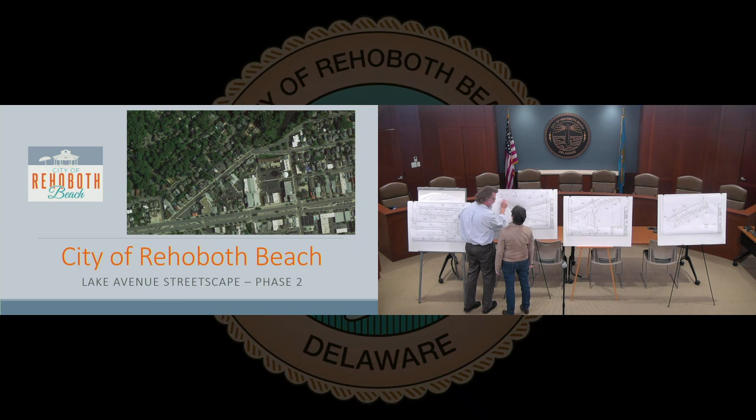This was all done back in 2012. There was nothing there, and we know that's there. But 2013 is when this was started. So we're not gonna touch any of that, if anything. It's just you're gonna need to be adding more. So if you see, we're gonna pretty much follow the curb line, but we're gonna put it...

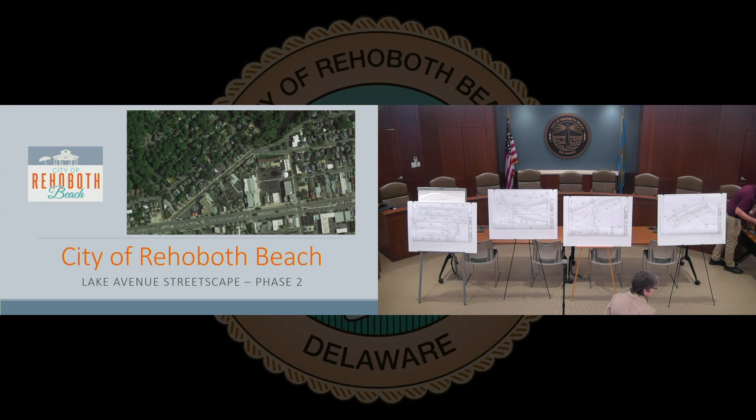Thank you all for coming to the Lake Avenue Streetscape Phase 2 project. We kicked this off about 5 years ago with Phase 1, a very successful project with our folks here on staff, who I'll introduce you to in a second, and then Jim Lober and Jeff from Kercher Engineering will be speaking as well. This is a project that the city's wanted for many years, Lake Avenue Streetscape Phase 1 and Phase 2. Phase 1 was successful for those folks who live there and the businesses. Hopefully it was successful—it was a headache while it was going on, but as construction always is.

This is an 80% funded program from DelDOT and 20% from the city of Rehoboth Beach. So we're looking at those valuable 80% funds to come through here. From the city, I'm Sharon Lynn, the city manager, for those who might not know me. Mayor Kuhns is here in the audience.

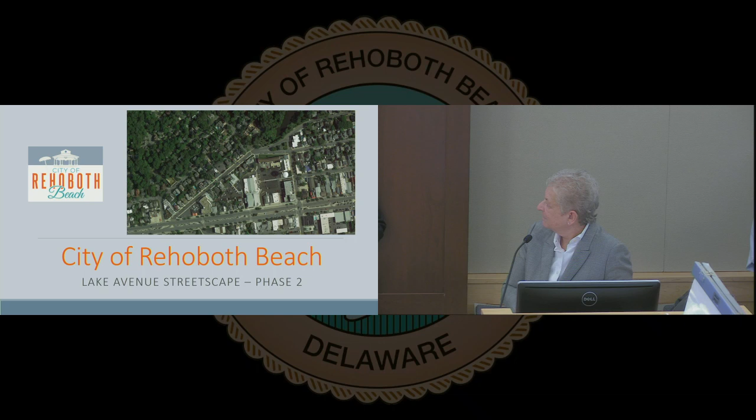So with that, we'll have Jim give you some factual information. Thank you, good morning everyone. As Sharon mentioned, my name is Jim Lober, I'm with the Kercher Group. We are one of the engineers that represent the city in projects like this. With me today is Jeff Williams, who's the main design energy behind what you see in black and white on the paper here today.

So just quickly, I'd like to go through essentially what, where, and when—what are we doing, where are we doing it, and when are we going to be doing it—so that everybody has a general idea of how this project is going to proceed and affect your daily lives here in Rehoboth. As Sharon mentioned, 80% of the funding is coming from the federal government through DelDOT. It is available to us because the crux of the project focuses on pedestrian safety and traffic calming.

So the improvements we're proposing are going to focus on pedestrian safety, wider sidewalks, traffic calming, and slightly narrower travel lanes. We're also going to be providing ADA compliance. Most of the stuff out there today is ADA compliant because the city does a good job of keeping up with those things, but some isn't. So as we go through everything we put in, we'll also provide ADA compliance—cross slopes, ramps, truncated domes, those types of things.

We're also going to provide some drainage improvements. There are some low spots that don't drain very well today. There are some pipes that are mixed materials, and some pipes that have holes in them, things like that we've discovered along the way, so we'll be replacing those as we go. And also some stormwater management—we're going to install one stormwater management BMP in the median between Olive and Maryland that will provide a little bit of quality control for the water that runs off the streets and then into Lake Gerar.

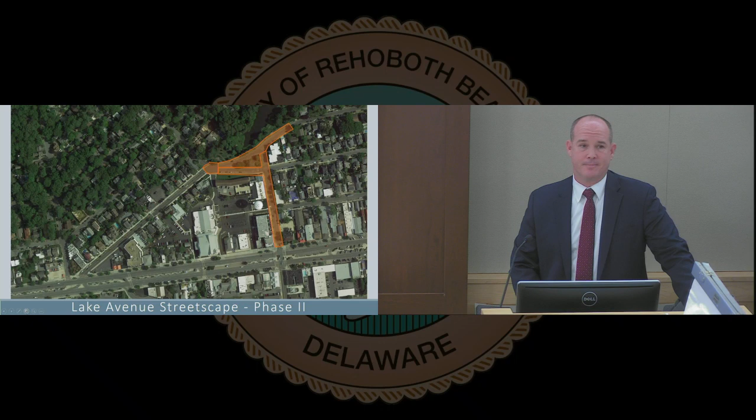Hopefully I didn't go through that too quickly, but that's the basics. If we have any questions, we're happy to answer everything we can.

Question: what about the staging area, where will you have your staging? The way the project is going to be staged is that we're going to close down the roads we're working on at the moment, other than for local traffic. The amount of space closed down within each phase of the project will allow us to stage within that phase, on the portions we're not currently working on.

Question: what about the parking that's currently there? I believe all of the parking currently there is to remain - it will be disturbed during construction, but when we're finished, parking will be essentially restored.

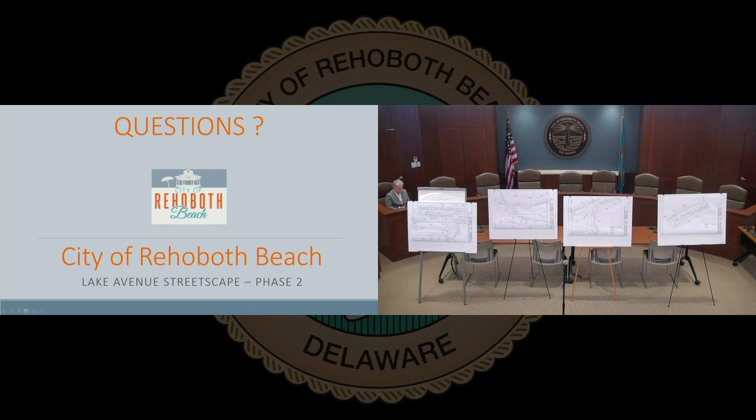Question: what does the stormwater management area in that little triangle look like in concept? It's what everybody would know as a rain garden. We'll dig a bigger hole than you'll see when finished, then fill it back up with planting soil - a mix of peat moss, sand, and mulch - with under-drains. What you'll see at the surface is a depression about 2.5 feet deep, with soft slopes, and a mulch planted bed with a catch basin as overflow. Water drains off the street into it, pools up, and slowly filters down through the planting media into the underdrain, which takes it to a catch basin.

In larger storms, when the slow surface filtration can't handle it, water builds up and overflows into the catch basin, then goes through the pipes. The pipes we're connecting to are existing drainage pipes that currently go to the lake. We'll be replacing that pipe because it's in bad condition, but it's water that gets to the lake now, and it will still get to the lake when we're finished - just slightly cleaner, and through a new pipe.

Question: will there be any additions or deletions of stop signs at the current intersections? Yes, good question - we're changing the intersection at Lake, 3rd, Olive, and Maryland significantly. That's currently not really an intersection in my mind, just a large swath of asphalt where everybody passes through. So we're going to extend the median, neck down the sidewalk from the sides, and create a formalized four-way stop intersection, so proceeding east on Lake, you'll have a stop sign.

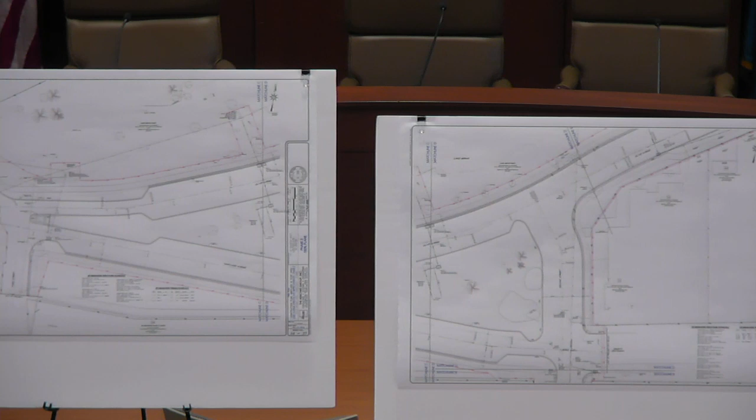You're proceeding south on 3rd, you'll have a stop sign. Proceeding west on Olive, you'll have a stop sign. And as you come out of the parking lot here at this facility, you'll also have a stop sign. So you'll have a 4-way stop condition. Also at the intersection of Second and Olive, we're going to add a stop sign there as well.

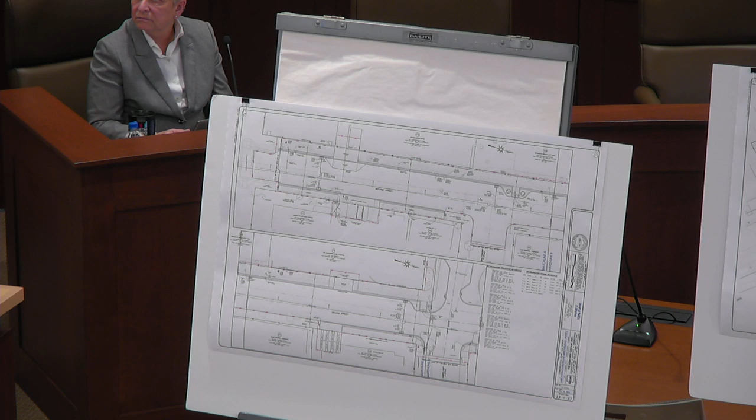Is Second turning straight now instead of at an angle? Second currently comes into Olive at an acute angle, so what we're going to do is bend it a little bit to bring it in at a 90. It actually comes in at a 90, but it's a lot wider, so we're going to lessen that radius turning east onto Olive, making it an actual intersection and putting a stop sign there.

I was going to ask, to make it easier, could you show us, because it's kind of hard to say? Could you show us on the plans so we can understand it a little more easily? Thank you, so this one here.

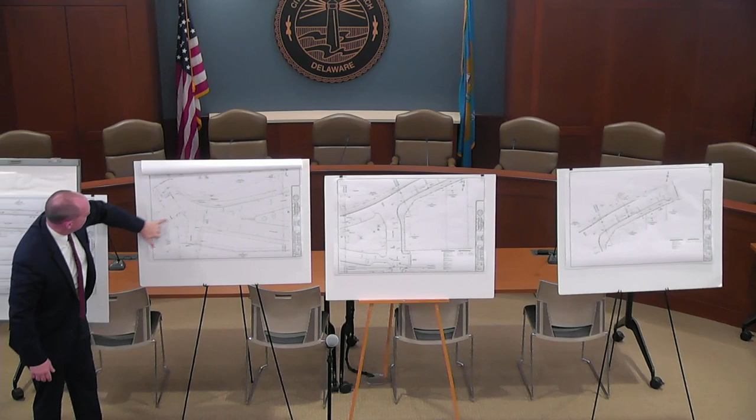This is the existing condition: Lake, 3rd through to the parking lot here, Olive, and Maryland. You can see these are the curbs, the median, the sidewalks here. So this entire area right now is all an open swath of asphalt that can get pretty confusing. Lake has to stop, 3rd has to stop, and then 3rd has to stop here, but Olive continues through uncontrolled.

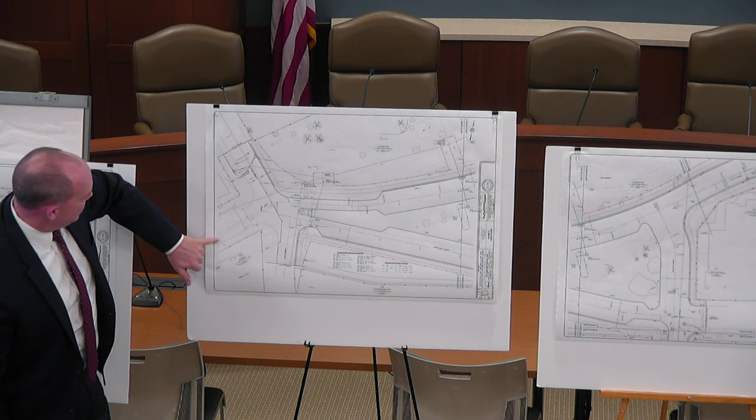So in the proposed condition, this median gets extended significantly, this sidewalk gets brought in significantly, and this large soft radius gets brought in to a tighter angle. There's now a crosswalk here and a stop sign here as well, so you'll have stop condition, stop condition, stop condition, stop condition. Olive will remain one way, and Maryland will remain one way.

And the other question I have, where it's extended, where you're showing it's extended — because I'm on the Mayor's Advisory Committee on Trees, I'm just wondering what is that material going to be?

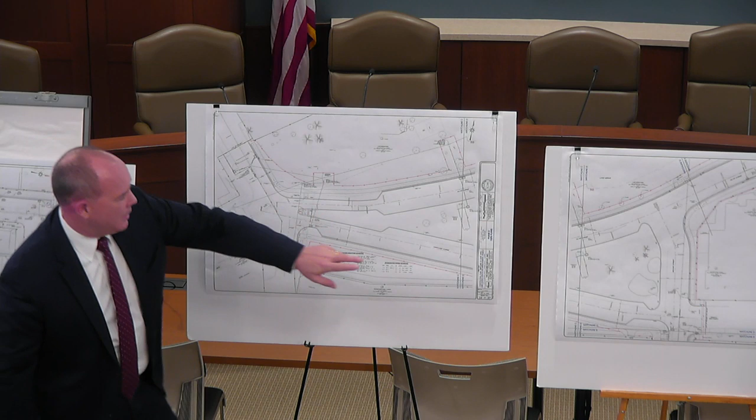This will be green space. Yeah, so there are plans — it's not part of this project because it's not an element that can be reimbursed by the federal funding, so it'll be a separate project. But there are plans in the works — here's the other end of that median, and the existing median ends somewhere in here, and we're extending it. There are plans to replant that entire median with stormwater management inside, so it's going to be renewed and it's all going to be green space.

Does this include a revised lighting plan for the entire project? It does not, we have not incorporated lighting into this. Would that be eligible for federal funding? I believe it would be if that were deemed necessary, it's just that we don't believe it needed to be approved for this phase.

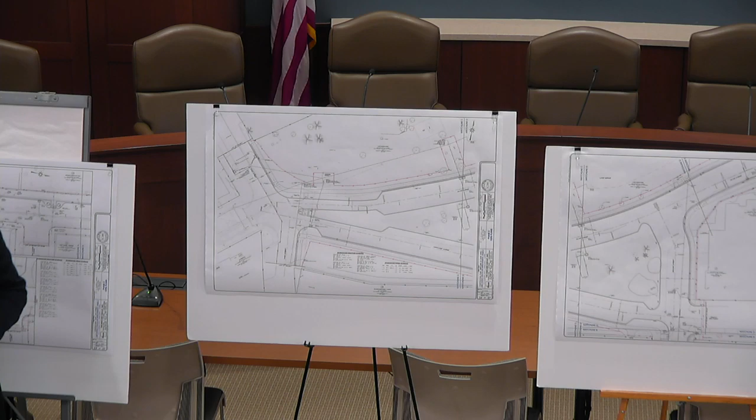As you come across Olive, will the existing lighting remain? The lighting that's out there will remain, yes. I believe there are some that need to be relocated based on the new layout — the existing light poles, if they're in a location where we're going to maintain the curb, will stay. If not, we'll relocate them in the same area, but inside that brick paver ribbon we put behind the curb, between the curb and the sidewalk.

Is that lighting City of Rehoboth or Delmarva? That's a good question — they are presently Delmarva. So is there no plan to change that? I believe Delmarva owns and maintains those, yes. But is now not the time to be planning for that, rather than going and digging it up afterwards? Planning for the city to take that lighting over from Delmarva?

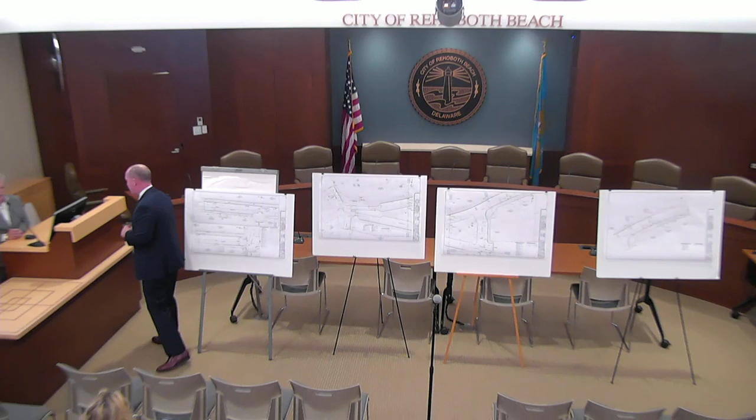A lot of people walk through there, there ought to be a lighting scheme, even if it's not a design, even if it's not part of this project. I think that any of the utilities we come across, we'll speak to them. I know during phase one it was a long shot to do anything like that, so we can cover that again. That's the best I can tell you right now.

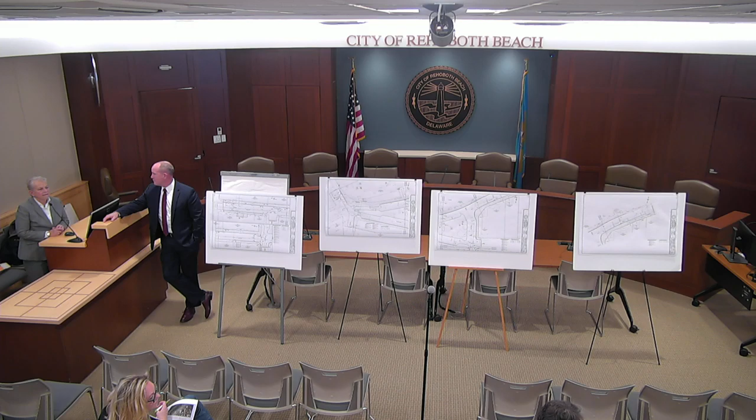Is there an opportunity to switch to LED lighting there as we go through this process, to Walter's point, by having a lighting plan, since we're trying to upgrade to LED lighting everywhere else? Did we do that during phase one of this process? I know we improved some of those cobra arms, but I don't know whether we put in LED. Yeah, that's something we can look into as well.

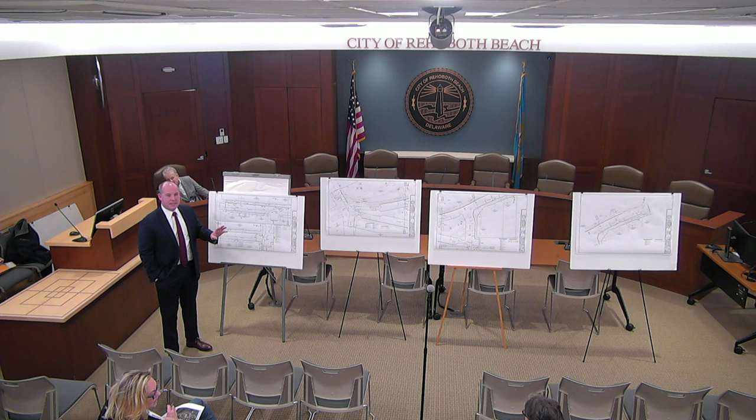Will the topography of the old triangle be greatly lowered, or will the trees all be gone? At the moment, I believe the plan is to remove most of the trees and replant it. I believe the intent is to save some of the more important ones. You're talking to a guy who doesn't really know landscaping, species, those types of things, but I do know that people who do know those things are on it and working on the design.

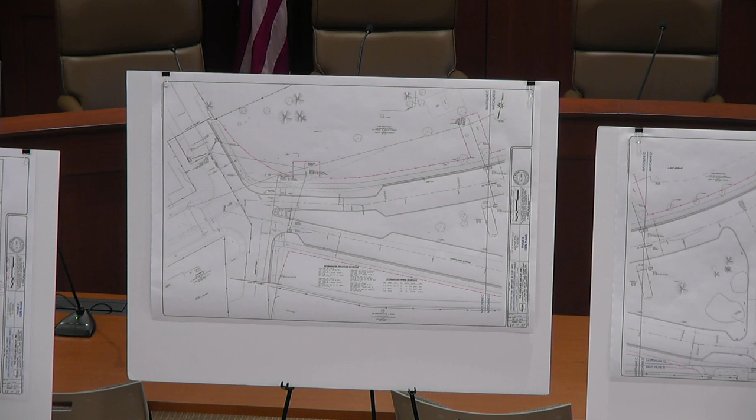So is it part of this plan or not? The grading within the islands to build the stormwater is part of this plan, and what will need to be removed to do that will be removed. We designed that originally to try to avoid some of the larger plants, so I don't think you'll see a big impact on what's existing because of this project, because of stormwater management construction. But I do believe the city has an intent for a bigger plan to create a different type of atmosphere there than what currently exists.

I'm not privy to those details. To be honest, I don't think those details have been worked out yet. That's something that, like I said, people with that expertise are working on.

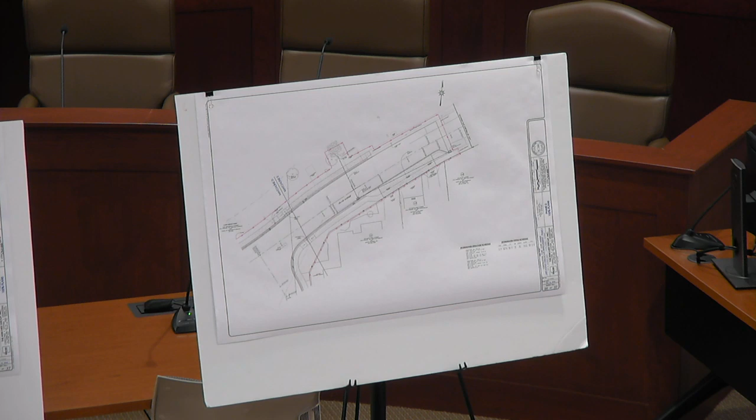Especially in the planning, there ought to be some ideas on that now, because it's a stand of trees, and visibility is also passive security. Sure, and again, the people working on that are experts in the field and have done other projects for the city, and I'm sure they'll work this one similarly to the way they have in the past. But it's not part of the federal funding, so it needs to be its own animal, for lack of a better phrase, and it's been pulled out.

Ms. Lingover: Hi, so we have somebody working on the landscape design right now. Since the project is over a year away from being planted, it's a little early for the landscape design, honestly. But we've had meetings, talked to the Breakers and some other interested involved parties, and worked with the landscape designer. For the triangle specifically, we're going to pull out a lot of the overgrown shrubs, a couple in the corner that really aren't great for visibility, as well as being 40-50 years old, and quite a few of them are non-native. So whatever comes out, we're going to be re-landscaping the triangle, and then we're going to be landscaping the rain garden basin as well.

The landscaping is going to be native, the intent is to do all the landscaping with natives. Speaking to our designer as well, she is focused on building for climate resiliency, so plants that are going to survive 5, 10 years the way our environment is going, with salt air and our wonderful challenges at the beach that even reach that far back.

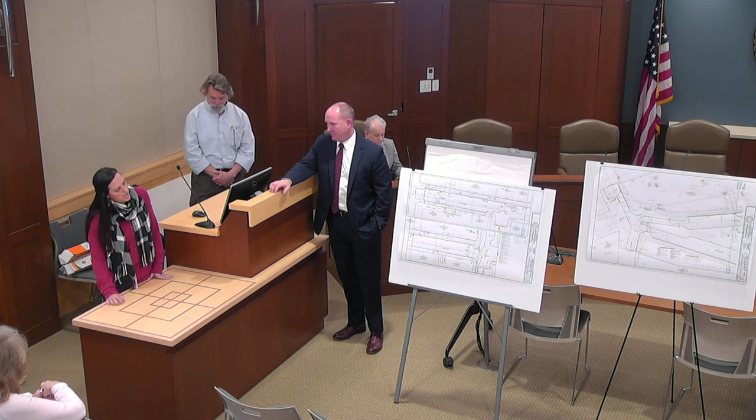Liz, I was just going to ask you, where are the benches going? Because I think that's a great idea, having the canopy trees with the benches. Yeah, as I said, we haven't finalized any of that, but my intent, I can point it out, and this could fluctuate, but my intent was to kind of have it somewhere in this corner area, probably back on here, so that we can pour concrete since we're using the bench, so maybe having it come like that, but that's still up for debate.

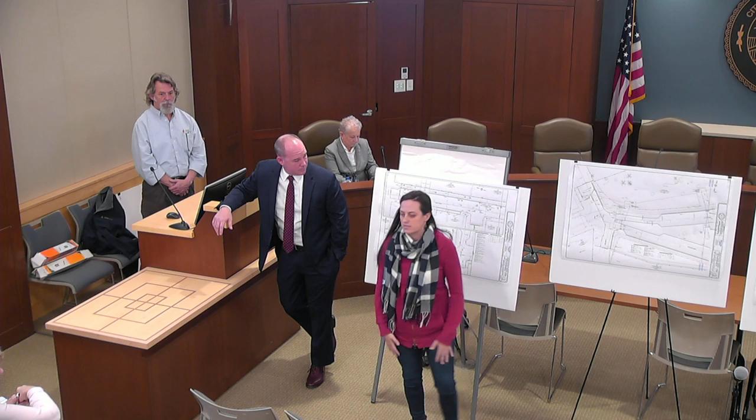You'll have ADA encroachment into that since it's the end of the sidewalk. Yes, there'll be an ADA ramp there. It'll all blend together. Thank you, Liz.

Is there a need for benches or any type of seating within the triangle itself? I think we talked about it and said probably not, because we're looking at that more as a through-path, so there's plenty of benches and seating on the other side, and then we'll have that on this side, so I think that'll be more of a walk-by than we want people to stop and hang out.

Yeah, I would say from a pedestrian safety standpoint, the park is right there. Let's encourage them to not hang out in the middle of it. It should look pretty as you walk by, so you can look at the nice landscaping, but keep moving.

Somebody else had it, Patrick.

Will the current width of the travel lanes on both Olive and Maryland change? Olive, yes. Maryland, no. Maryland stays the same. I think they're both about the same, between 11 and 12 feet, which will be the same as Lake Avenue is.

So will that affect the southern curb line on Maryland and the northern curb line on Olive? Will that change from existing? Not very much. What we're doing is putting bump outs there to channelize the traffic down the lane and putting the parking up against the curb. So where we're not creating this channelized effect to create the intersection, it will remain where it is.

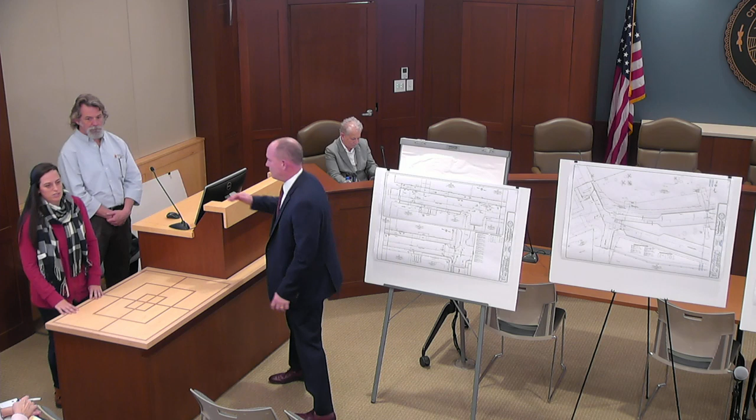I'm the general manager of the Breakers. That lawn area you're talking about, we end up maintaining and taking care of. Are you planning on taking out that tree, the little holly, or what's the plan? We haven't decided, to be honest with you. I'd say looking at it, more than likely, that would be my general thought.

Is there a way we can get more information, like ongoing as things develop? Because we look at it as well. Yeah, if you want, the city website, Chris keeps it pretty updated, I believe under projects. So when we get the design, we'll probably post it there. I'd keep checking back on that one, and if you sign up with your email, they'll probably send you updates as well.

All right, anybody else? The parking is gonna remain parallel, not forward? No, there's no 90-degree parking.

This may go back to a plant question, I'm not sure. I don't know, I'm sitting down now. No, go ahead.

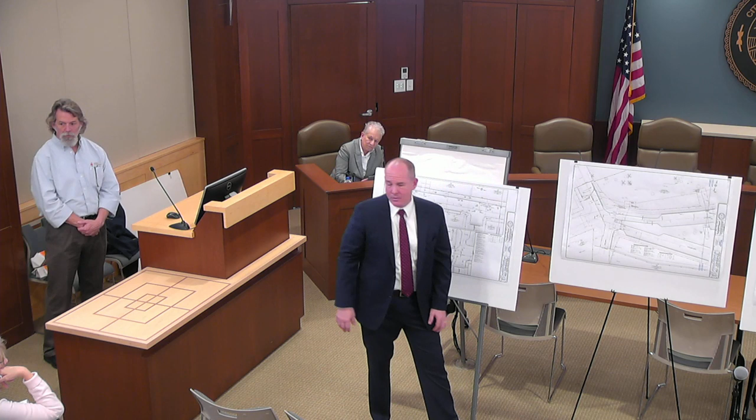But the majority of that, is there ability to affect planting or replanting? Our goal was to do pockets to keep it manageable, because it's a big space if you look at it, and we didn't want to take out the landscaping they had put in. I think they have some Rose of Sharon along their front porches and patios.

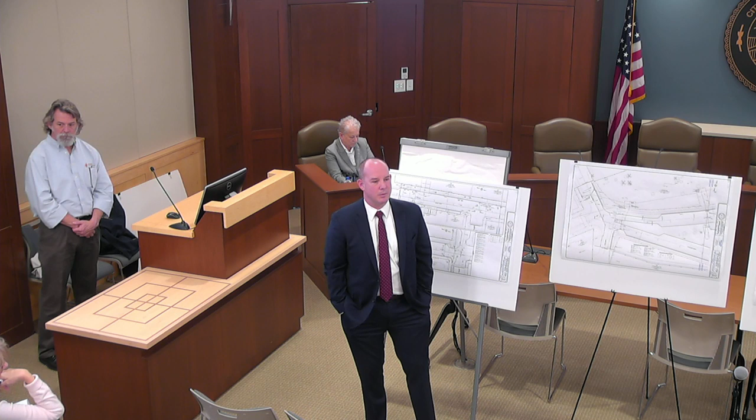So we were planning on reclaiming and maintaining the whole area exclusive of their shrubs, but still keeping a good amount of green open space. Just a consideration going forward, there is an irrigation system there, so that should be taken into account. We spoke to the Breakers about it, and as long as it's still working and we can adapt it to our use, we're gonna try to incorporate that into our plans instead of ripping it out and putting in a new one.

And Liz, I forgot to ask, what is the budget for the planting, the landscaping? Is there a budget yet for that? It's in the CIP, not for this fiscal year, but the next fiscal year. Do you have a number for that? Without the design it's hard, but a placeholder was about 50,000. Just wanted to get a general idea. Thanks.

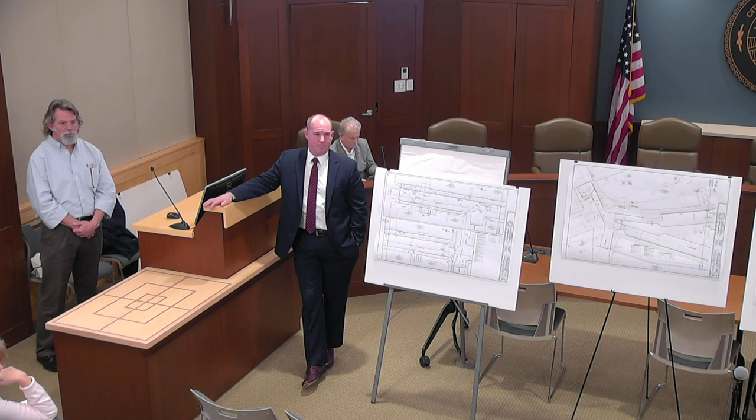On your drawing number 3, as you turn the corner coming from the west, so many trucks come into town because the only way to get there is on Lake Avenue from the west. You come down and put a bump out there to reduce the crossing time for pedestrians. Will the tractor trailer be able to make that turn, since I'd assume Olive is still westbound only? Olive will be westbound only, yes. So this radius we're installing corresponds to what would be passable by a large truck, a large articulated truck.

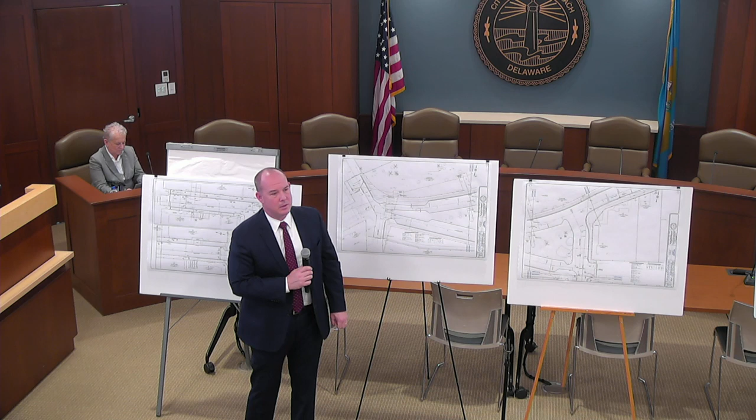Maryland Avenue beyond Second, you're talking? Right there at the end of that block. No, Maryland Avenue is one-way, one travel lane through with parking on both sides. With just one lane or two? One lane, with parking on both sides. So currently, there is, at the end, there's 2 lanes. Correct, and we've necked that down for traffic calming purposes, right?

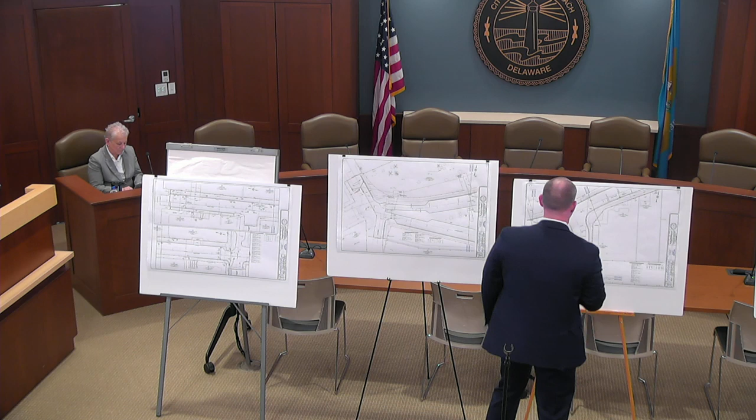Will there be a crosswalk from the corner of Olive and Second, to get across the street to the pond? A crosswalk in this location? I believe so, yes - the striping's not on this sheet, but yes. This represents an ADA ramp, and there's a corresponding one across the street. We have to separate the information on the sheet so the striping doesn't show here, but there will be a piano key there. That's why we're making that more of a corner than what it is right now.

There will also be signage approaching those crosswalks telling people to yield or stop to the pedestrians in the crosswalk. But not stop signs? No. At Olive? Second and Olive, there's going to be stop signs now. Yes, there'll be a stop sign there. Coming down Olive, there will be a sign 20 feet before the crosswalk, letting people know they have to stop or yield to the pedestrians. At all crosswalks, we put that.

So what is the net gain or loss in parking, number of parking spaces? That's a very good question, Stan. Honestly, off the top of my head, I don't know the exact number. I know we did the best we could to maintain it. I know we're losing a couple to grading along Second, access to the parking garages and things like that. I'll count it up and get it to you.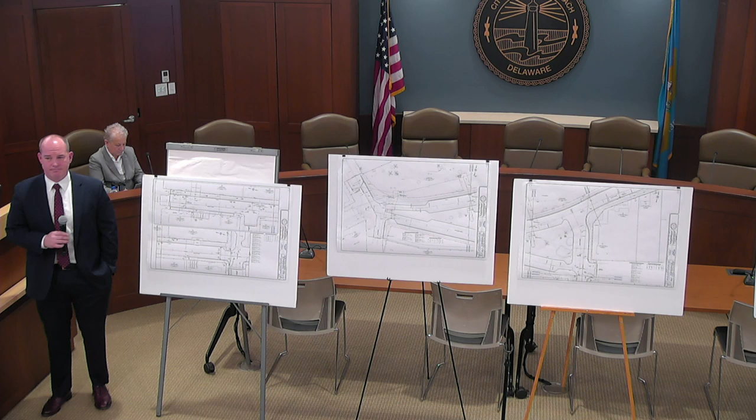Can we get access to the PDFs of all these drawings? Sure. I find these more helpful than - oh sure, yeah, I'm not against that. You guys put them online, I guess. Sure.

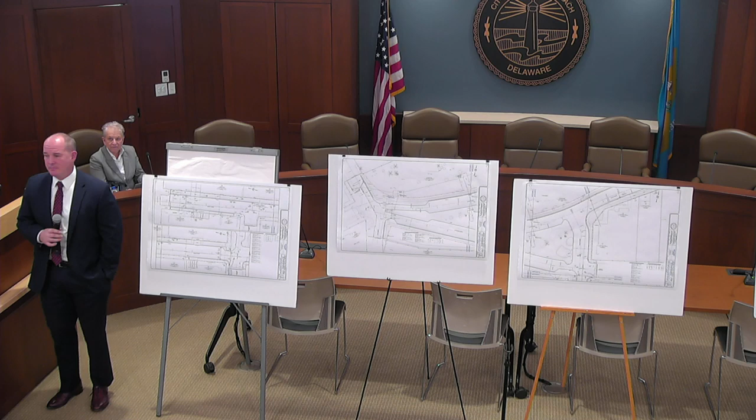Seeing none? Going once? Going twice? Go ahead, one last question.

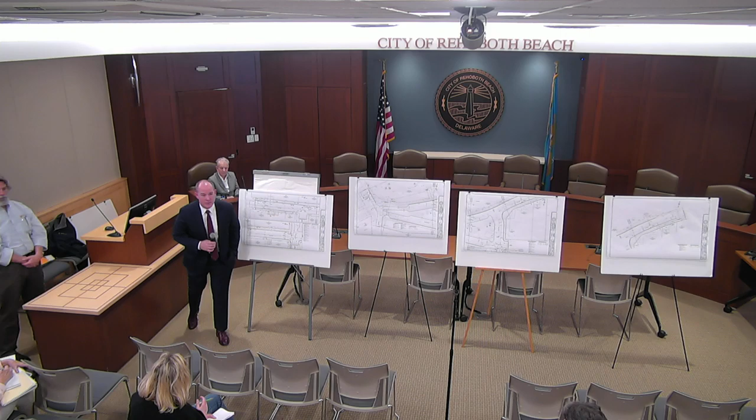All funding for the project has been approved? I'm going to defer to DelDOT on that one. You made it to the last question, Todd. Todd is here from DelDOT. Yes. Based on cost estimates? Yes. We've done a construction estimate, submitted it to DelDOT for their review, and everything's been worked through that process.